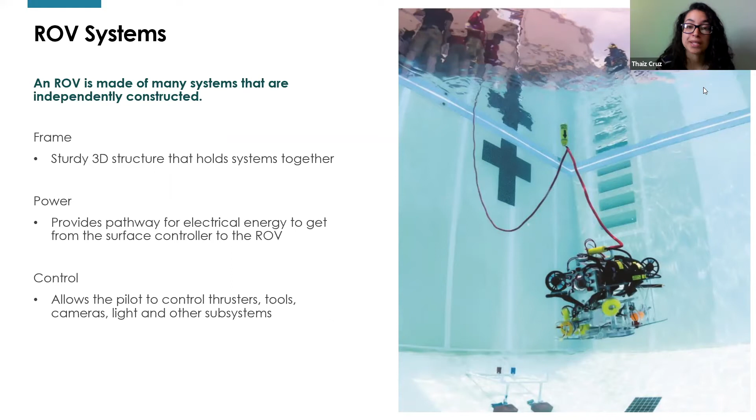Next, we have our power, which provides the electrical pathway to get from the surface, where the controller is, to the ROV underwater. You have your controls, which allow the driver to control thrusters, tools, cameras, lights, and other subsystems of the ROV. You have the tether, a wire that goes from the controller at the surface to the ROV underwater, transmitting data between the two.

There's the propulsion, which allows the ROV to move through the water. You have your buoyancy, which allows the ROV to sink and float, and mission tools, such as grippers, sensors, and other tools needed to complete the mission tasks.

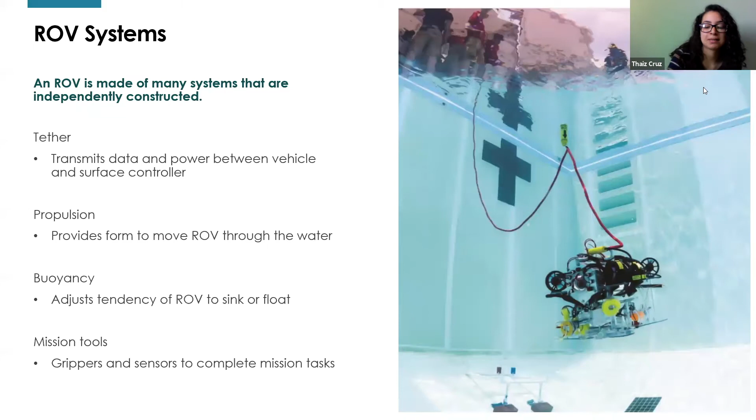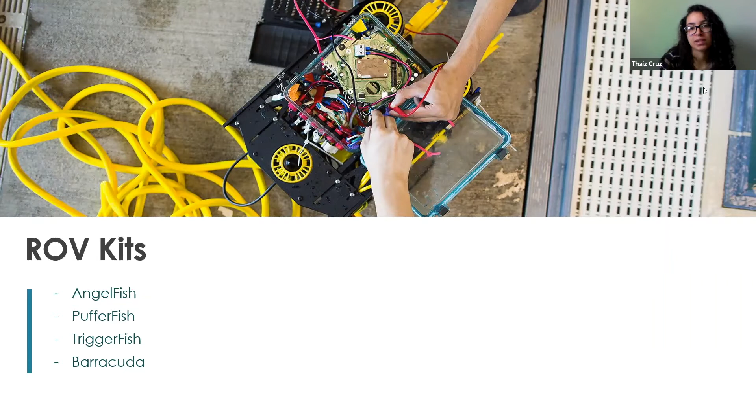There are ROV kits available for you to use, and they typically go along with the competition class. The triggerfish and the barracuda go with your intermediate and advanced classes, which are the Explorer and the Ranger. The angelfish and the pufferfish go with your beginner and beginner intermediate classes, which are the Scout and the Navigator. We recommend the pufferfish because it provides all of the materials that you need to build the ROV, and it goes with the Scout level, which is what we recommend if you're brand new to this.

Each year, MATE releases a theme, which is what all of their missions are based on. This year's theme is Excite, Educate, Empower: Students Engineering Solutions to Global Problems. There are 3 tasks which the missions are based on.

The first task is the ubiquitous problem of plastic pollution. These missions will deal with remediation of plastics clogging our rivers, lakes, waterways, and oceans. An example would be the robot having to gather plastic debris from the surface of the water and bring it back up.

The second task is the catastrophic impact of climate change on coral reefs. This would deal with remediation of health on coral reefs affected by climate change and changing ocean temperatures.

The third task is maintaining healthy waterways part 2, Delaware River and Bay, which deals with remediation of contaminants in our waterways. An example would be the robot having to gather sediment from the bottom of the water and bring it back up to the surface for testing.

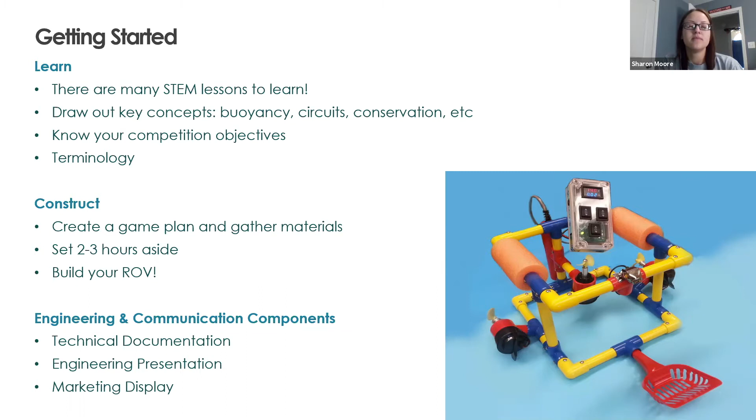The engineering and communication components - this is going to be the other side of the competition. So after you have this ROV, you do the product demonstration, actually putting it in the water and going through the challenge. There's more to MATE - the students are basically entrepreneurs, so they create this company or business. They have technical documentation, an engineering presentation, and a marketing display as well. I'll dive into those.

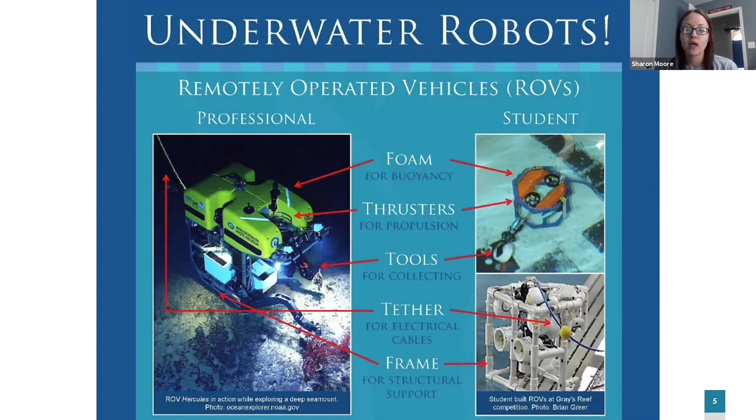The frame is just the 3D structure, and it's up to the students to decide what's best for the competition. I'll show you what the props look like later. The power is going to be that electrical tether, which you'll have to waterproof, so that'll be another objective for them to figure out.

The control system is the control box, where the circuits come in, and they have to actually solder the circuit board together. We'll need some help to support the students, but just shadow them. Propulsion is the motors - you build them, and once you build each piece, you put it all together and you've got your ROV.

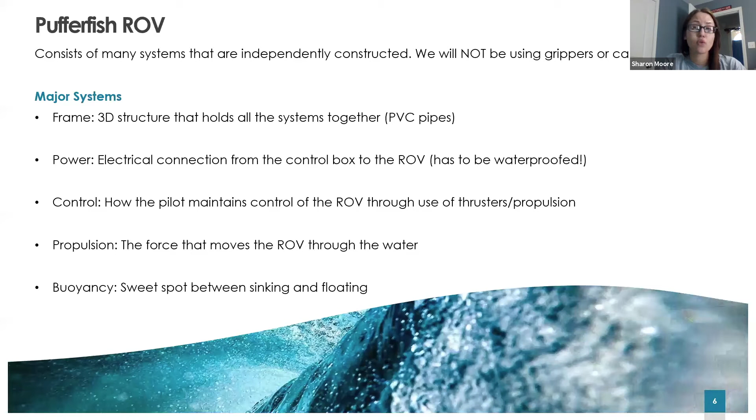It's step by step, and we have all the information and links to give you if you want them. So we'll dive into the components of a pufferfish kit. We hosted a workshop not too long ago, and some teachers received the kit at the end.

You will need a soldering iron, which may be a purchase we invest in. We're still deciding that, but we're also thinking about hosting a workshop, because I personally had never soldered before until I went to a MATE ROV workshop.

It's definitely different and very dangerous, so we'll have to watch the students as they're doing it, because students are supposed to have full control of this competition - they're building the bot, learning the concepts, building their business, selling it. We're there to just encourage them, support them, and also learn.

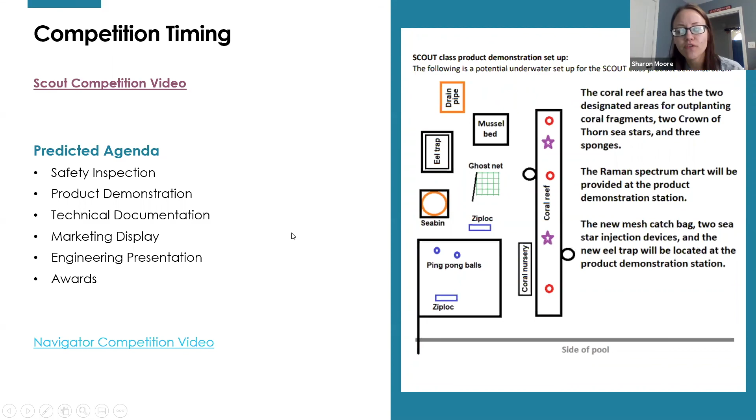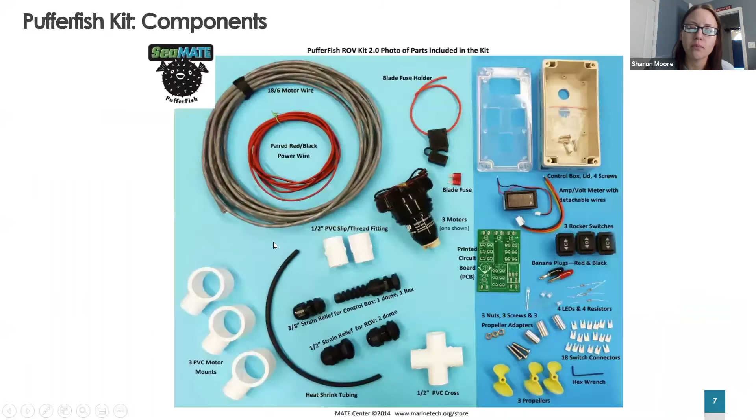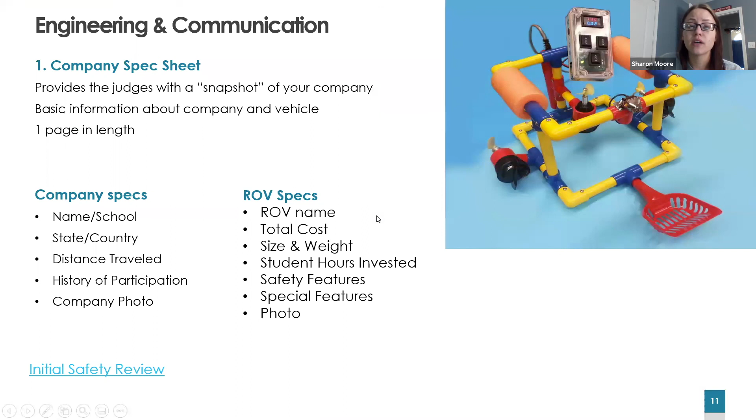So that's kind of an overview. I did notice I had grippers, so I didn't see how they were working - we may have to go back through that and check on the gripper part. When I went through the MATE ROV workshop and we built the ROV, we didn't add any extra stuff like that because the scout level is very basic. So we'll definitely check up on that for sure.

So I want to talk about why MATE ROV, in case you still have doubts. It's great for career exploration - all these kids, we live in Tennessee, we're not very close to the ocean, and maybe they really want to dive into marine biology or that kind of career. This is a way to get them interested and give them background for when they make the choice on colleges and careers. Also, they use ROVs for conservation - that's a big part of Mate, learning about conservation, and robots are cool. Mate's well established around the world, so it's backing up the resume kind of thing. Real world application, and they get to practice soft skills, which is really important, and team collaboration. So there's a lot going on with Mate, and we hope you're interested, and we will help you get there as well.

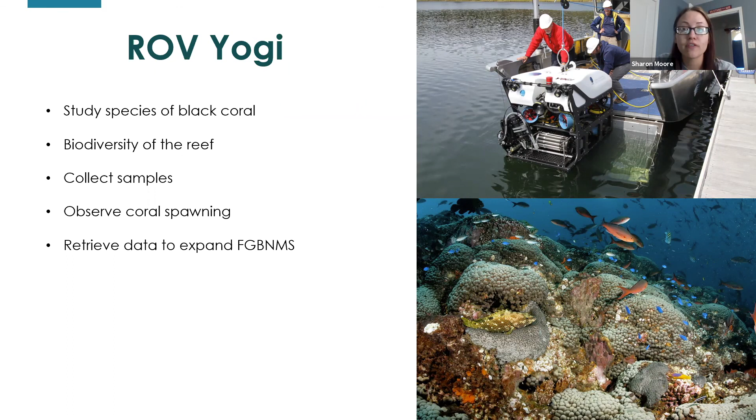So this is about the Flower Garden Banks National Marine Sanctuary. It's in the Gulf of Mexico, and this is an actual ROV named Yogi, currently studying black coral, biodiversity in the reef, collecting samples, observing coral spawning, and retrieving data to expand the sanctuary. This is an ROV of Mate's that they've actually created, so they do use ROVs in real life, and it's a big part of the world.